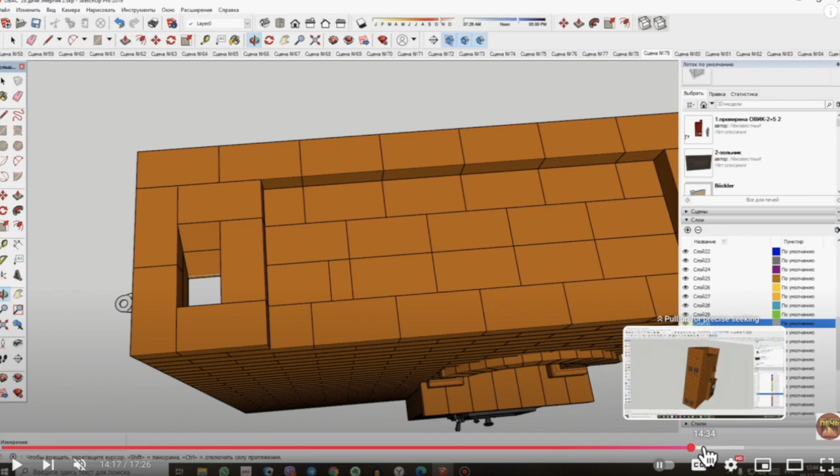So let me jump around here, I wanted to go to 1439. Bear with me as I jump around here, sorry, I have to do this a bit. That's the stove, they use these computer programs. Now again, very intricate, but you'll see as we go through the core of it, anyone can do this.

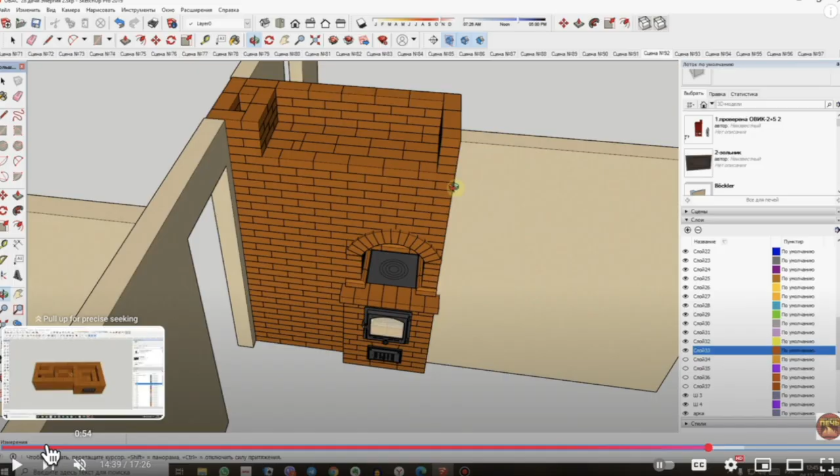So again, I'm going to go over how he built it, show you or tell you everything you need to know if you want to build this exact stove. Then I'll show you the simpler version, and then the simplest, absolute simplest version, if you wanted to make this yourself and make it a little bit thinner, just out of fire bricks. You'd have to do the whole thing in fire brick.

So this is the base of the stove. Again, the wood is loaded in here. The fire and gas is pulled down here, second bell, back and out. All right, let me go to this, this is a good thing to show you.

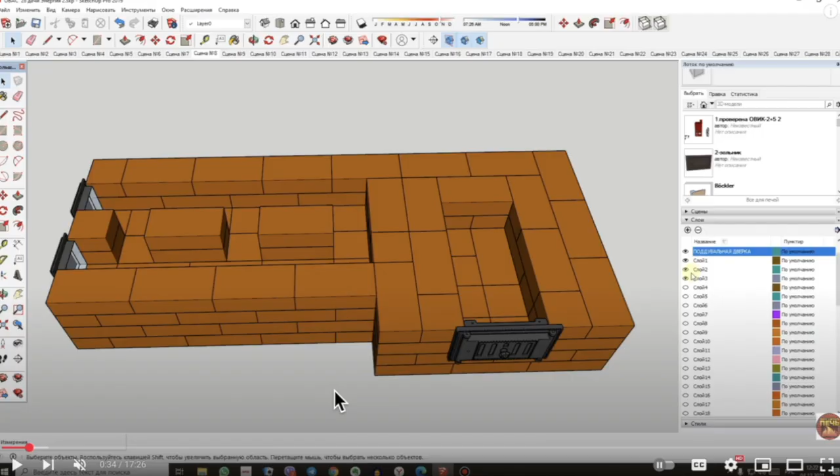Now one thing that has to be explained here: the Russians have the advantage with their fire bricks. They can get the same size red bricks as fire bricks, so they'll construct a fire brick firebox, which we can't do in the same way here in the United States. Our fire brick, 9 inches by 4.5, is never the same as red brick. You can't get a red brick that corresponds. I couldn't believe it when I first found this out years ago, that I can't get a red brick the same size as this fire brick.

No, unless you have them custom made and ordered and all this stuff. So basically we're forced to make this entire stove out of fire brick, or if you wanted to use red brick and fire brick, you have to end up making like 100 and some cuts with the red brick. So as I go through this and the simple versions, I assume somebody's going to build this entire stove out of fire brick. The fire brick is twice as expensive as a regular brick, probably like $2.15 to $2.20 per brick.

Can be as low as $2.05 per brick, but it will absorb heat. The regular fire brick's heavy and will absorb heat in the same way as a red brick. So you can make an entire double bell stove out of just fire brick, and it'll hold up just fine for years.

So anyway, let's get into the design. Right now he has not constructed the firebox, which is a yellow or tan brick. This is the ash door, which will allow the air in.

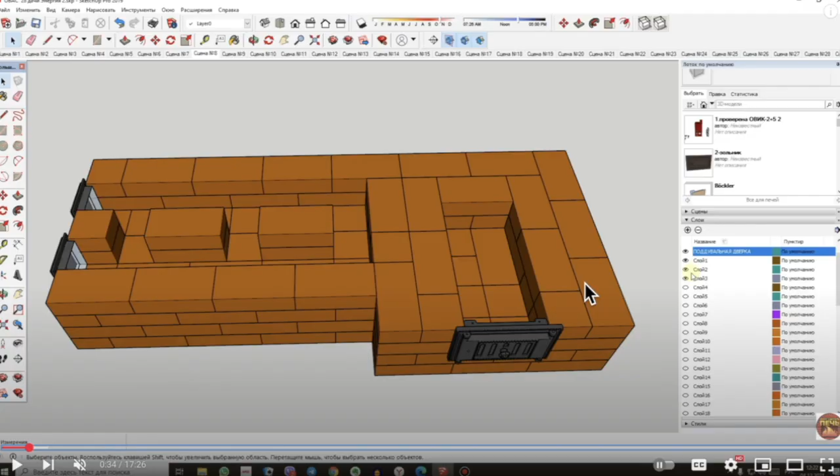This is extremely difficult for anybody listening to me, because in the U.S. our red bricks are not the same size as the fire brick. You can do it if you have a great gigantic wet saw and make a bunch of cuts with the red brick, no problem. So here he's laying out the base with the red brick, and then the fire brick fits right on top perfectly. We don't have that option in the U.S.

Basically what you're seeing here is the outline of the red brick. If you wanted to construct it, you would just use the outline shown in red brick as your fire brick, and that would be fine. We wouldn't have a separate firebox as he's constructed here.

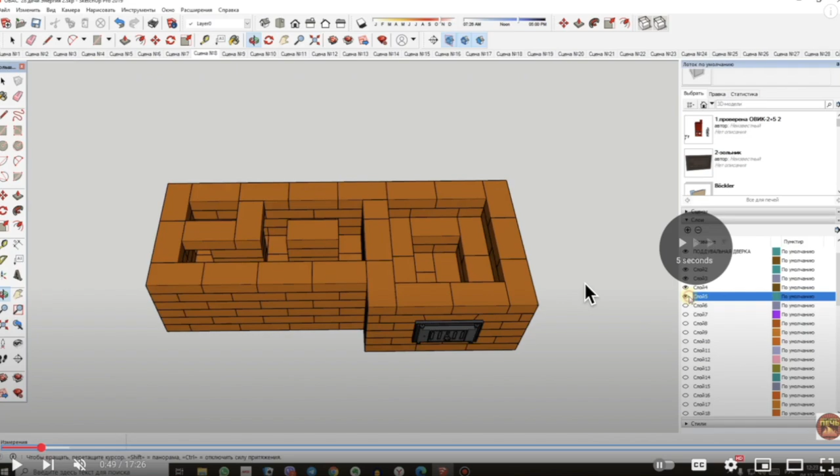So let me go through this a little bit more quickly. Here he's started to construct the first mini chimney up into the second bell. So this is the firebox - wood is loaded in from this side. As this wall goes up, there'll be a hole at the top in this wall that allows the gases to flow over the top, and then they want to rise, right?

So they're going to hit the top here, and the only way to get into the second bell or out into the chimney, out of the house, is they will have to dive down and slip under here. You'll see how this is constructed in a moment.

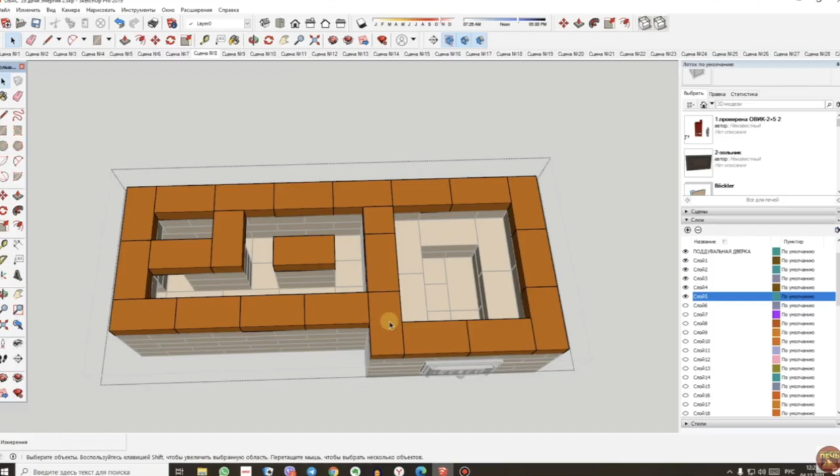I'm going to skip around. Let me see and put my hand on pause. Yeah, you'll see the hole - dive down.

The gases will basically hit this brick in the middle. Some will go this way, some will go this way. They're allowed two entrances into this first little lifting chamber that goes into the second bell. The reason for this is this stove is 2.5 wide.

So this is a Kuznetsov design that he's copied, from stove.ru. Kuznetsov does a great job with his stoves - if you create a shelf in the middle here, you can then use it for your ceiling to separate the first bell from the second bell. At the top of the stove, you'll just lay bricks across, and this shelf will hold your ceiling. You don't need lintels or angle irons to hold your bricks.

Also, having a bunch of bricks piled up in the middle here just adds mass. Any opportunity to add 150 to 200 pounds of mass, or whatever it is, is a good idea.

A lot of people build these stoves - they put a rocket stove or a batch box rocket stove into a gigantic bell, a gigantic square of red brick, and 80% of that square is completely open. I'm always saying, well, why not fill up that square, that bell, with mass? Even better, the best way to do that is with cinder block or cement block with holes - just a cement block that allows a lot of air. Obviously, if you fill it up with mass, you don't want to block your entrances and your exits.

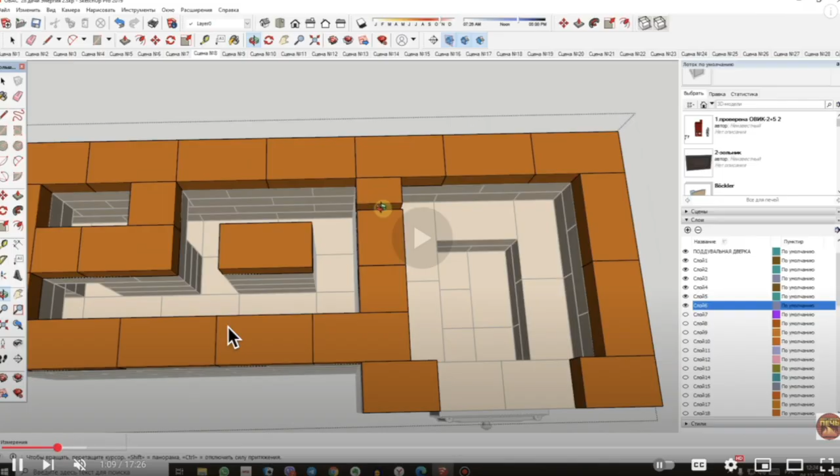So playing again, let me move a little bit more quickly. He went back, going forward - don't lock up, no, it's just going to be a little slow.

Of course, when they make a slit like that in front of the door, the slit allows a little bit of air to flow up and wash the glass, so your glass doesn't get black.

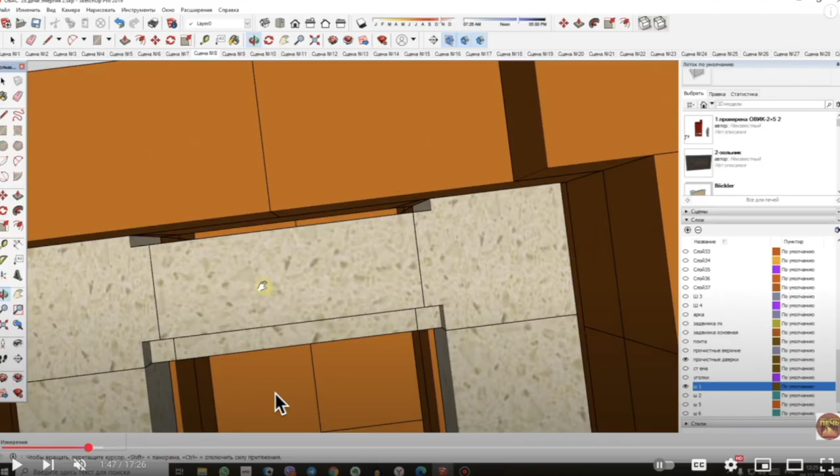Sometimes when the glass gets black, if you burn your firebox hot enough, eventually that black and that char will burn off because of the heat. So there, to create a place for the grate, he makes a lip.

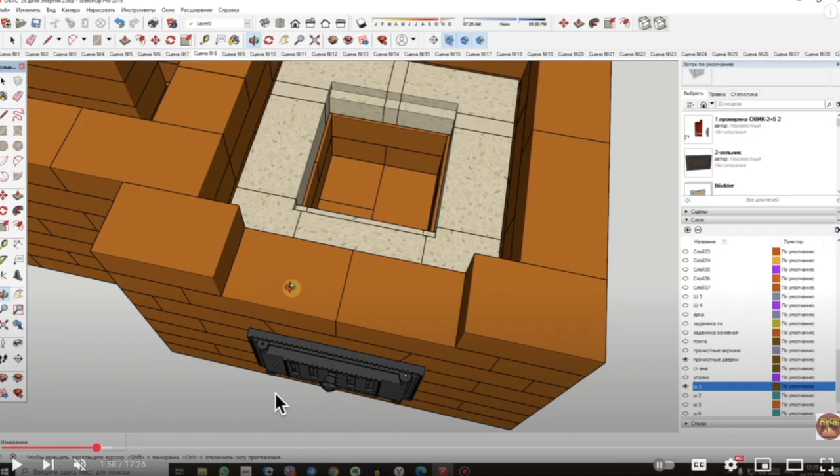Fire brick is very easy to cut on a wet saw. Just use a wet saw or wear a mask. It's dangerous with the silica and the sand. Red brick you can breathe if you cut it. You don't want to breathe fire brick or silica sand if you cut it. He's making a lip there, which eventually will hold the grate.

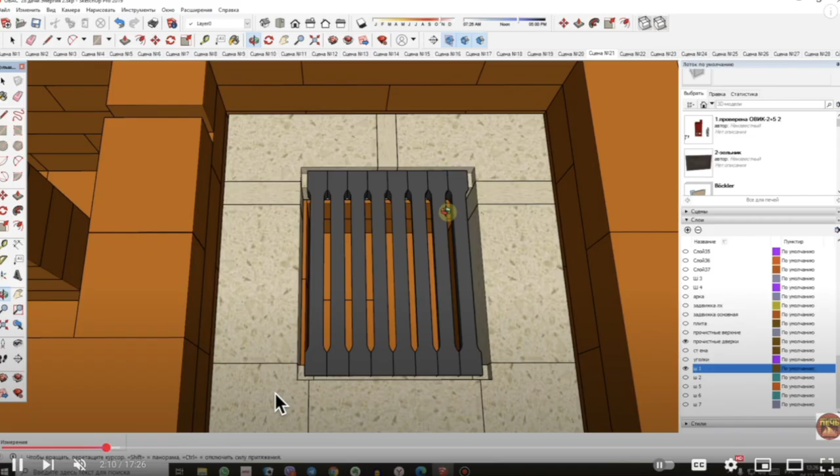There's the grate. Again, the people that I'm talking to aren't going to do this because, again, your red brick and fire brick don't go together. What we'll do, and I'll show you how to do that, is just make the whole thing out of fire brick. We're not going to do a firebox inside of a red brick box. The whole thing will be made out of fire brick. So I'm going to skip forward.

I don't know. I don't know why it's so slow here, guys.

Okay, there he's starting to create the Russian dry slot, dry seam, or dry joint. So very, very shortly after the firebox, there's a little seam of, Kuznetsov says 2 to 3 centimeters, but I would make it wider, of say 1 inch or just under an inch. That allows some of the gases to immediately start escaping into this second chamber over here.

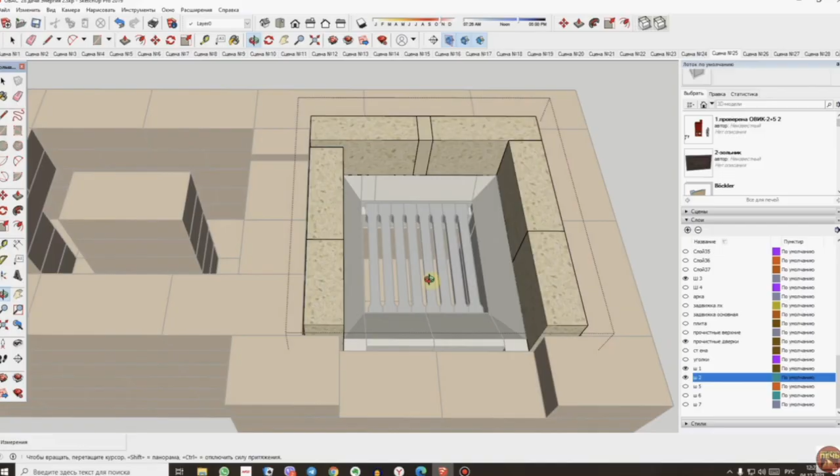This is not the primary way your gases and flame are going to get into this chamber, but I think this slit or slot is really a good idea for a lot of reasons. I don't want to spend too much time on it here, but almost right away, with a little bit less than 1 inch, allow the gases to immediately start, if you can.

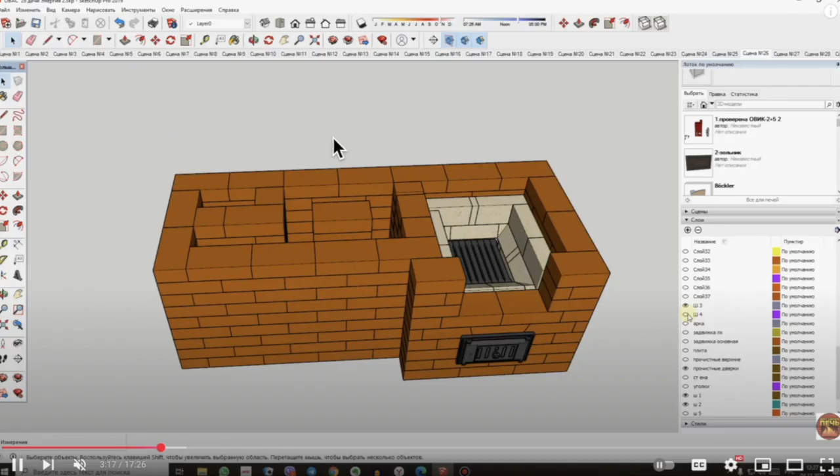Now, if you're blocked there by red brick, it looks like he's blocked, but he would have made another slit in that red brick to allow the gases to come through into that chamber off to the left. Yeah, he's put a slit in both. It helps with draft. It helps with initial draft. It helps with priming. There's a lot of reasons for it.

You lose a little bit of efficiency, but most of the flame wants to shoot straight up. Most of the flame does not want to go through that slit. And I don't want to get into what the Russians believe, that all the cool gases escape early. That, to me, is a bunch of BS. But we'll talk about that some other time.

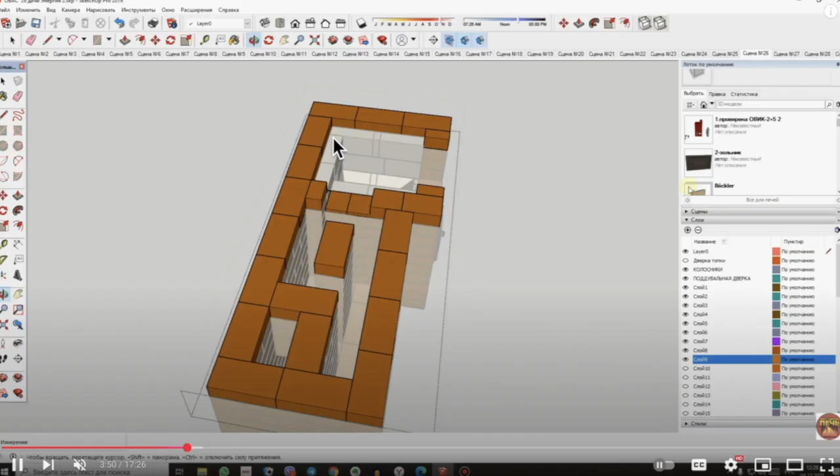Okay, starting to make the hole, the major hole, so the flame and the gases from the firebox can escape over into that secondary chamber. Here he will have a cooking plate on top, and then there's also a second bell on top. We'll talk about what your options are if you're a novice and you don't want to make the arch and the cooking plate and all the little add-ons.

So with the hole here, the flames will start shooting through this little slit, which I recommend, and then the hole gets big. Flames will pour over the top here and hit this. This basically adds mass, and it's a place for your ceiling bricks to rest on, so you don't have to use lintels or angle irons. Some of the gases will hit this wall. They'll have to dive down and go under here and up this first lifting channel into the second bell.

If this was all you had for your stove and you just wanted to make it an L stove, you could also extend this firebox this way and make it much longer. You could make it a bench stove, or an L stove per the way it had to fit into your living room or house. It still would be close to 1,000 bricks, and still a heck of a masonry heater if you decided not to do the second bell and all the add-ons. Still 5 times better than an iron stove or a regular stove.

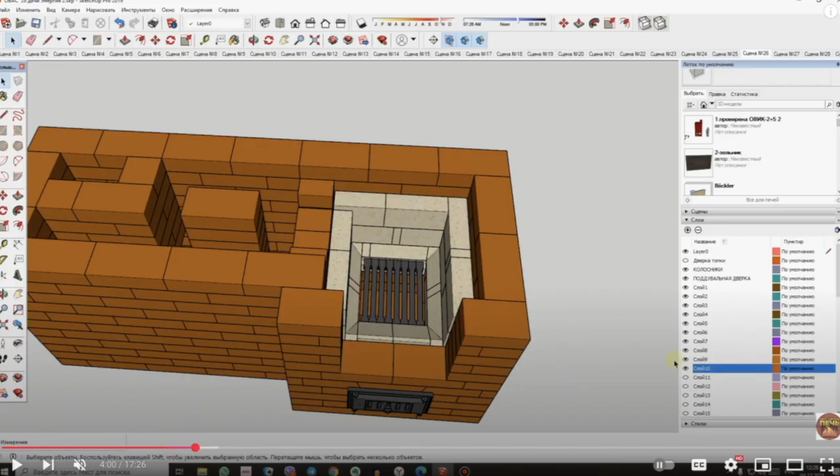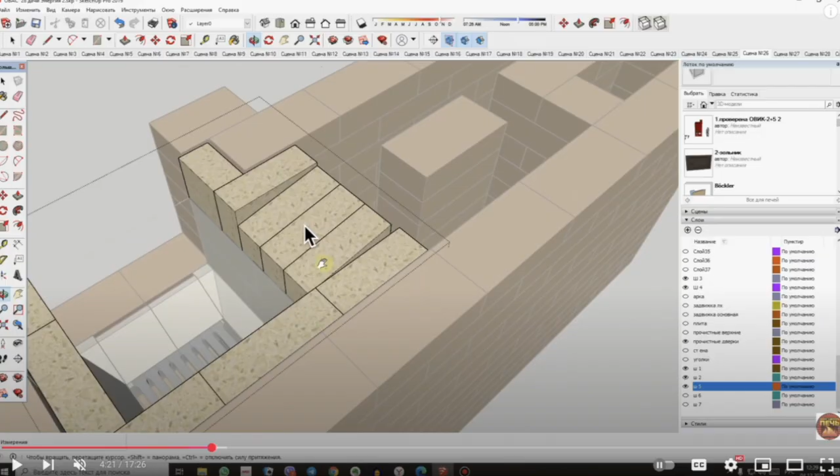This guy's a master stove maker. I assure you, just make a hole, a nice big hole. There's no reason to make angled cuts; it means less than 1%. Okay, there you can see it. Little angle up, forget that stuff, guys. It might mean 0.5% in terms of efficiency, or sometimes these guys don't want to make them too simple for their clients. That's how they make their living.

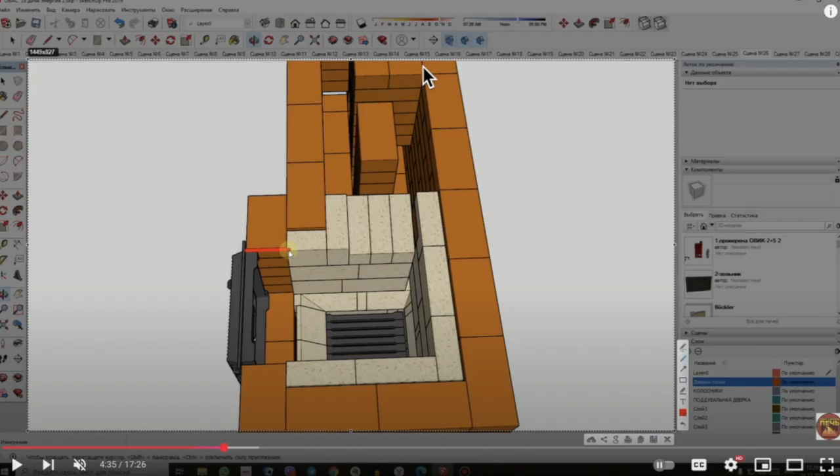You can see the dry seam here starts immediately. And again, if you're just doing this all in firebrick, you just make the stove, the red brick here that you see would be your firebrick. And there would be no box inside the box. I'll talk about that a little bit later. You still can make your dry seam and allow the gases to escape immediately.

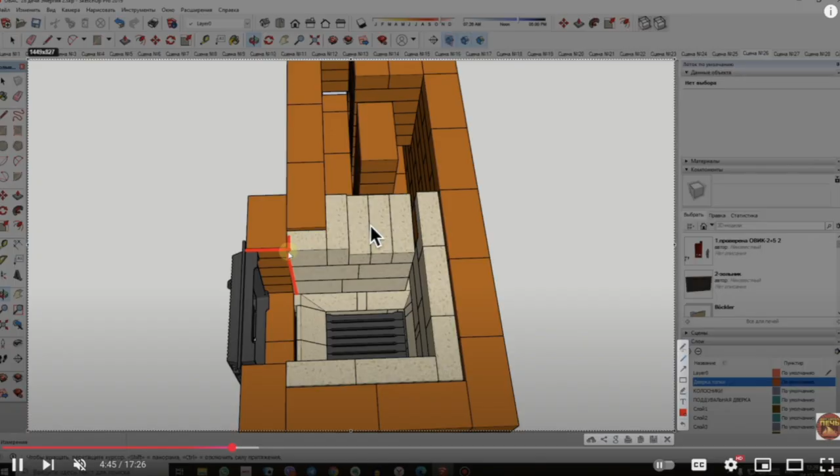Okay. I'm a little bit slower than I thought, guys. I need to speed it up a bit. And again, I have little tiny mini bricks downstairs stacked up. I'll show you the real simple design at the end. All right. Let me go back. There's the door, and I'll show you the door.

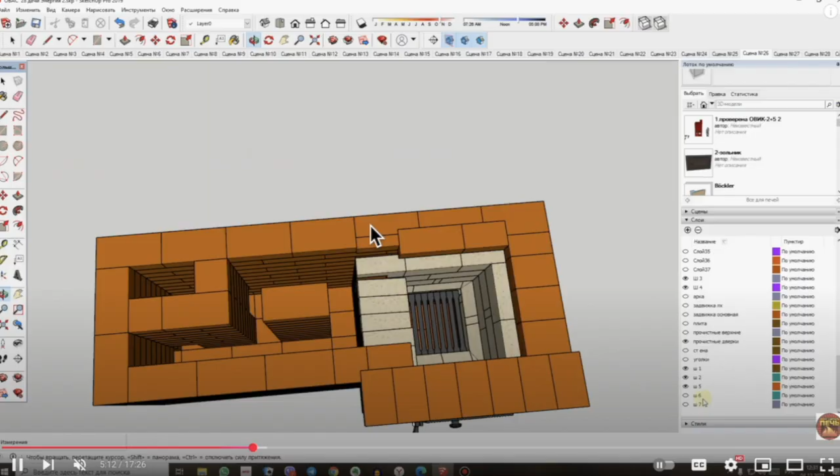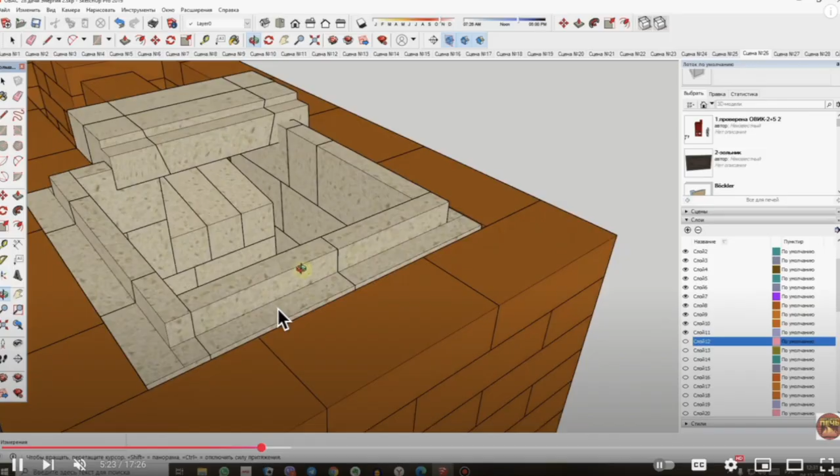Okay, there you go. You can see flames come up. There's going to be a cook plate on top. So they'll slam against an iron cook plate and be pushed left through this hole. Always err on making your hole a little bit larger. Never choke it off. Never try to get too cute. If you lose a little efficiency, you'll have to add an extra 2 or 3 logs a day. Big deal. Don't want to get too perfect if you're a novice.

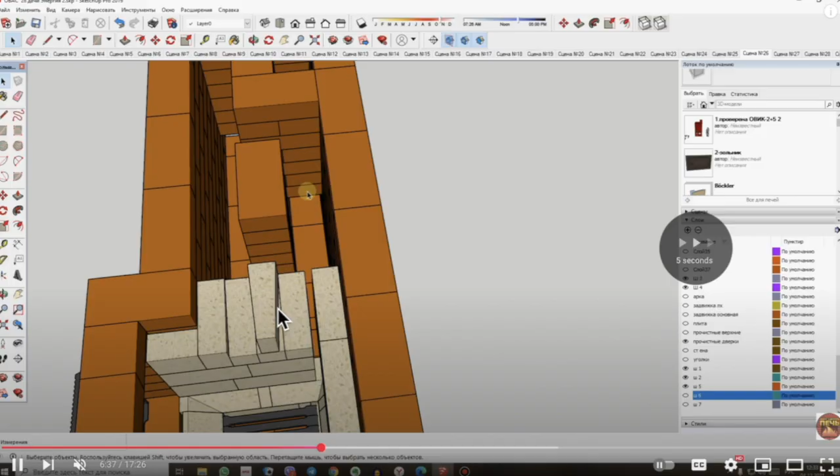Again, he's combining firebrick with red brick, which we're not going to do. The general principle here is a great simple stove you can do all in firebrick, and I'll show you how to do that. Let me skip ahead. We're not making these angle cuts. There is no reason for it. Just make a freaking hole. And then I like this shelf here for a lot of reasons.

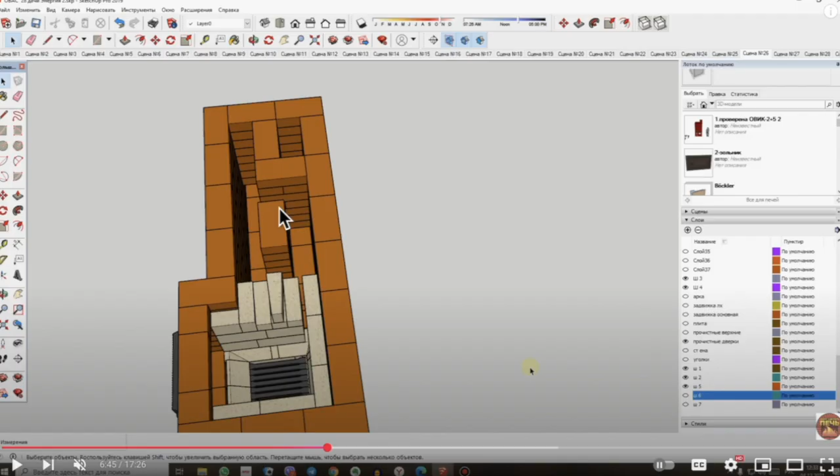Between the first bell and the second bell on top, you have to make a ceiling. Your bricks will completely close everything off except this lifting channel that allows the gases of the flame to get up into the second bell. It allows you just to lay your bricks across without a metal lintel or angle iron. If you have to bridge a big gap, that's what you need to use. And then people put insulation around them because they warp a bit, so avoid it if you can, especially if it's right in the path of the flame.

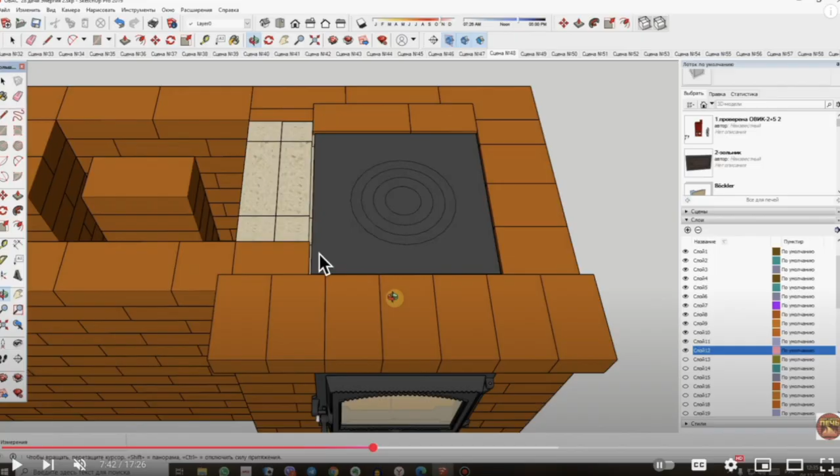A lot of heat will be thrown from the door, and a lot of heat will come off this cook plate. Without a cook plate, you could also put a piece of soapstone on top that would heat up to red hot in just about 10 minutes versus the hour and a half a fire brick would take. So it's a hybrid approach. You can get a little bit of quick heat out of it if you do something like this.

If you put a cook plate on, though, or a piece of soapstone, this is a personal thing with me, carbon monoxide, and just without all the details, you don't want to take any chances. You got to seal the absolute crap out of this, even if it looks ugly. If your flames are pounding up into this cook plate and you don't have this thing sealed right, you got to check. You do not want gases and carbon monoxide.

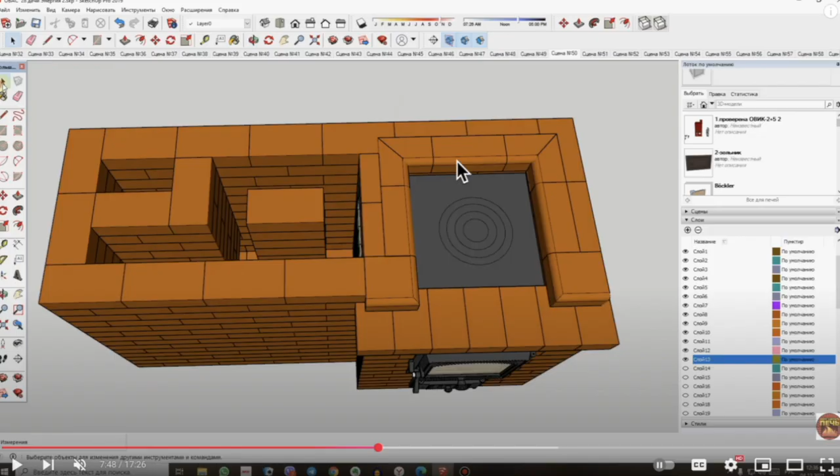Extremely dangerous what these Russians do to have the flames pounding up against these cook plates, and they'll even remove the discs for the cooking. I don't know. If their house is airy and the air flows through, it's safe. American houses are airtight. It's extremely dangerous. I don't want to harp on it for personal reasons. If you're going to add a plate, make sure you are triple safe.

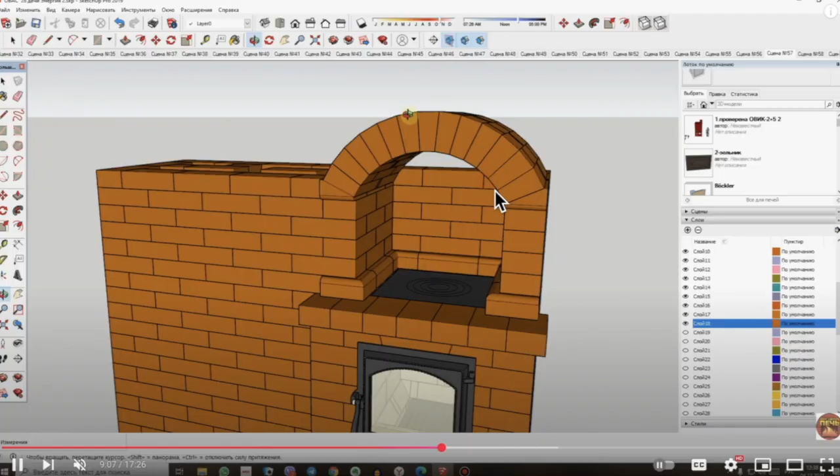All right. Trying to move a little bit faster here. Fast forward. Same principles. Since there's a cook plate, he needs to make a whole space on top for the cooking and to get in there to put the frying pan on. He puts in an arch for decorative reasons. Again, the novices that are going to make this are not going to put in the arch. Let me finish up. Okay, there we go. This is the first chamber, first bell completed.

Gases slam against the cook plate. They're pushed left through the hole. They go across here and they have to dive down to get into the lifting channel. They're going to come up. Why are there 2 holes here, Matt? Well, one's going to be a damper. You can see this is cut out already for the damper. And one is going to be the primary lifting channel to get into the second bell, the second box on top of a box. This damper will be here for the first startup or the priming of it.

It's needed because this stove will just smoke your house out. With these intricate designs, you can't just throw wood in here and light it. It'll smoke your entire house out. And who knows how long it would take to prime. You have to have a way to prime the stove, to have a quick path for the gases to escape, to get into the chimney, to heat the chimney so the chimney starts pulling. Then when you close the damper, which then starts winding the gases around, they'll continue to wind around and get out. Without this, you'll smoke your entire house out.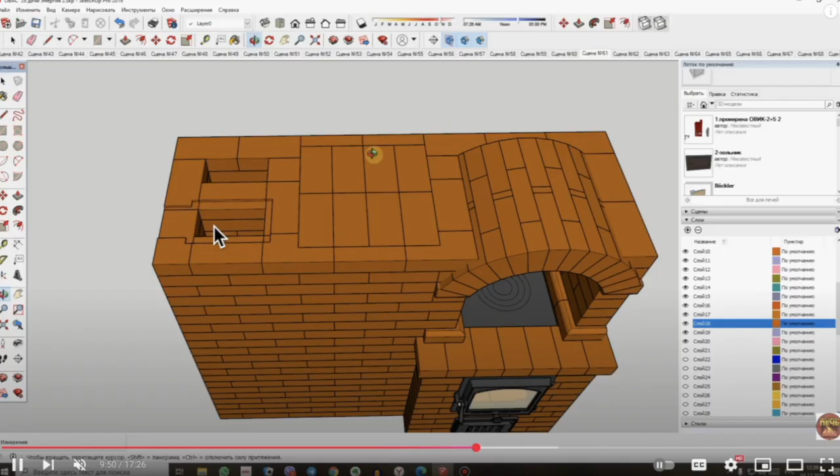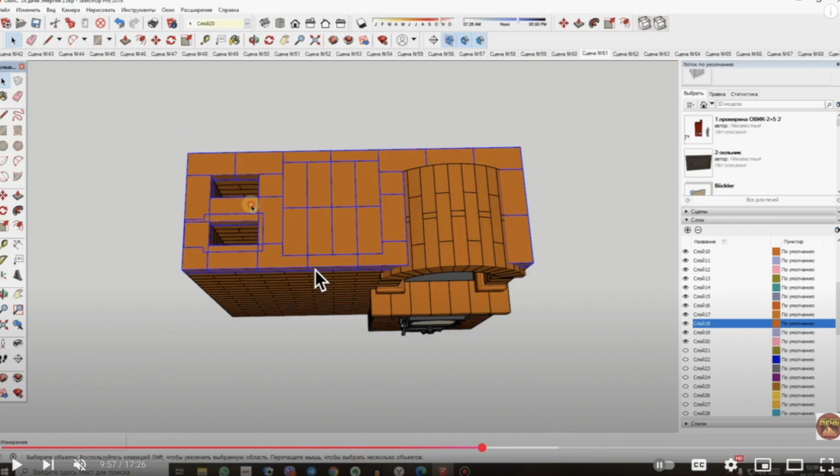But this is a great example of proper use of a damper. So again, he's created that first ceiling. Remember those bricks in the middle that I called the shelf? Just laying bricks across with the shelf holding everything up without lintels going across, without angle irons. And let me skip forward. There you go. There is the lifting channel, remember, was in the back. Gases escape, go underneath this way, go under this way, up the lifting channel.

But when the stove is first lit for the very first time, the damper is opened, so the gases don't have to dive down and come up this lifting channel. The gases will then flow right across the top and up through the damper, into the second box, into the second bell, and then right up through the chimney, warming the chimney. Once the chimney gets to be a few hundred degrees, sometimes 5 minutes of burning, not even. You could err on the side of 10 minutes of burning. Close the damper, then that forces all the gases low, and they're going to wind around the stove because you've primed everything and heated everything up first.

So this is also the correct use of a damper, because I don't want to get into it too much, but these dampers, they're not completely airtight, and they could potentially let a little smoke or carbon monoxide out underneath the plate here. But I shouldn't even be mentioning this. This is kind of a complex subject. This is a perfect location for a damper. People put these dampers right in the line of the fire, right in the line of where the gases and the smoke go, and I think it's a little dangerous, but we'll talk about that some other time. Hold on.

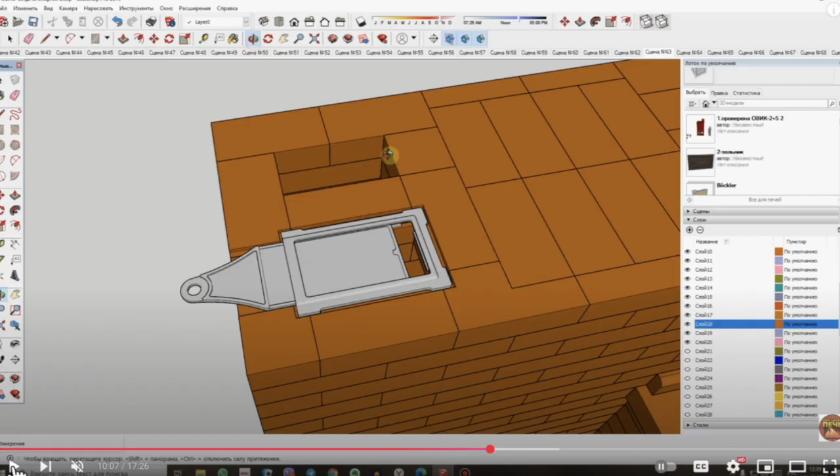Okay, where were we? Play. Let's fast forward to the 17-minute video. We're about at 10 minutes.

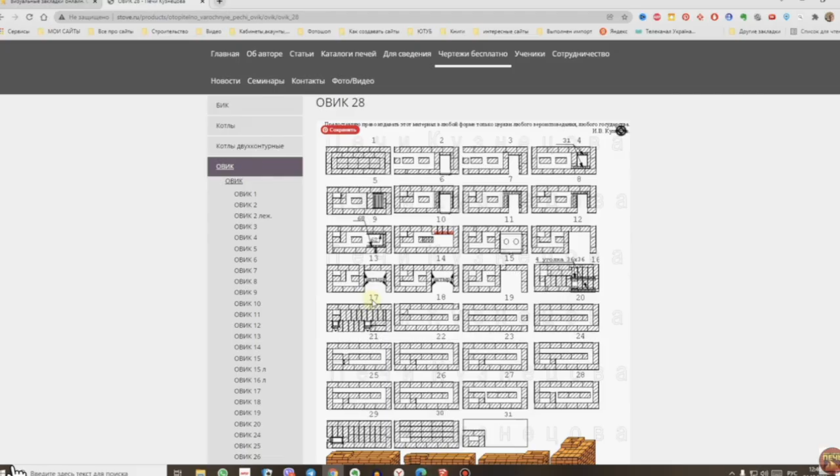Okay, she's just showing you there. It's stove.ru - the plans for the more complicated stove are under OVIK. It's all in Russian. This is the section for cooking and heating stoves, Kuznetsov's website, stove.ru. But you don't need this - he shows you everything here. Again, I'll show you a simple design.

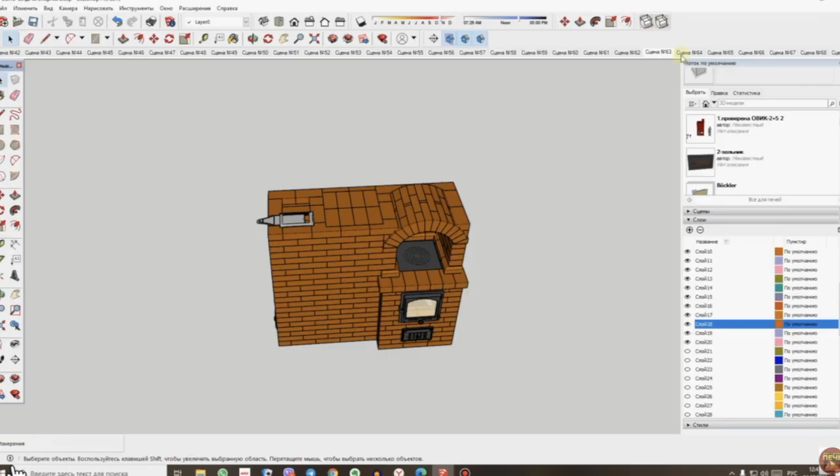Now here it looks like the stove's done, right? That's only the first bell, only the first section that's completed. But you could finish there, of course - you don't have to continue with the second bell. It's just some massive masonry heater, thousands of pounds of stored thermal mass, if you want to do the second bell on top. This is a pretty classic way of how the second bells, or the bells on top, are done.

Once the damper is closed here, again, the lifting channel is in the back. The gases - this will become a wall. The gases will wind around, and you know where the ultimate chimney is going to be, through the roof, where the damper is, is where the chimney is going to be. So it's going to be up the front here, I'm sure. Why - is this, like for somebody that's new - is this absolutely necessary, a way for the gases to escape here and go around here?

No, again, remember, he's just using this brick as a way to hold other bricks. This is not necessary at all for the design or the physics of the stove. It's just here to hold bricks for when you make your ceiling - something's got to hold them up without lintels or angle irons. So just make sure you have enough room; some of the gases will come around here, but some will also be pushed here, and this won't be that hot.

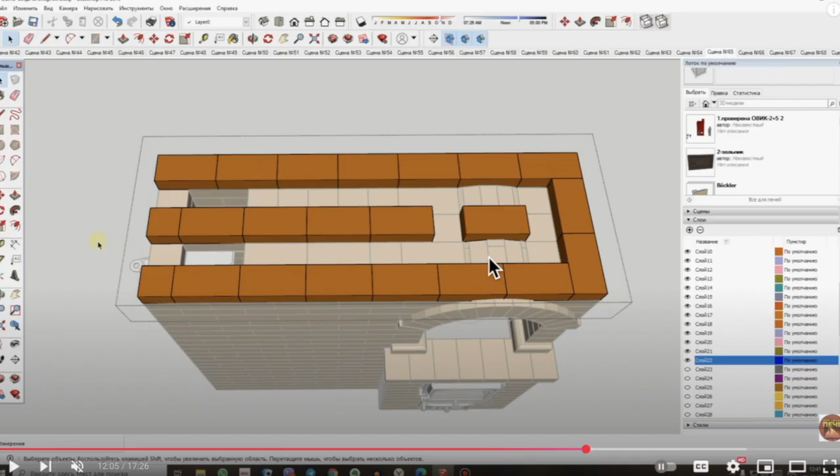Most will want to escape - they have a mind of their own, they want to escape as soon as possible. But some will go around the side, and this will heat up as well. The idea behind all these stoves is to have all the bricks touch the hot gases and have them all heat up relatively equally.

I'm going to go back and show you the clean out doors. There's 2 clean out doors there, and there's also 2 clean out doors at the bottom on the base. Very, very important to be able to get in and clean it out.

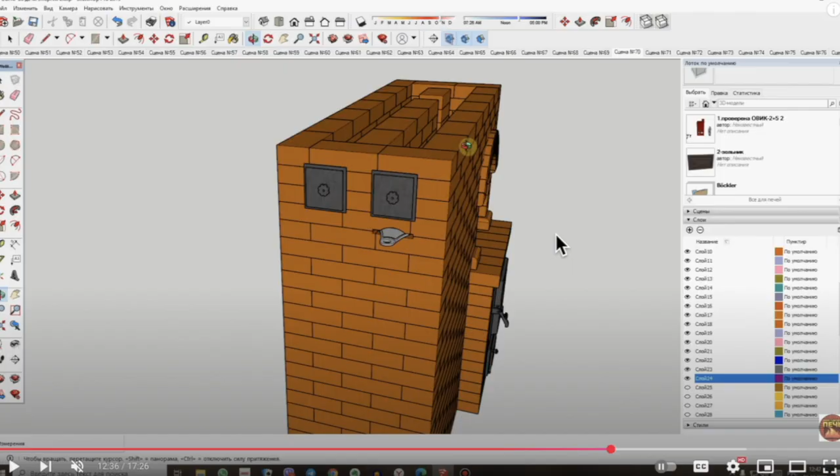They usually say they only have to clean them like once a year - there's usually not much in there. But if you're burning the wrong kind of wood, or it's wet, or if it backs up, you need the way to clean out. The whole thing's for nothing if you back up or have a creosote problem.

And so same principle here. Let me go back actually. Okay, so where the lifting channel was in the back here, he'll go up. Does he go up 2 or 3 rows before they start making that next wall?

So the gases - this will go way up. The gases will come all the way up, and then they'll have to wrap around in this form here, but much, much higher. They'll wrap around, and they want to stay high. They'll have to dive down to get underneath and up the final channel to get out.

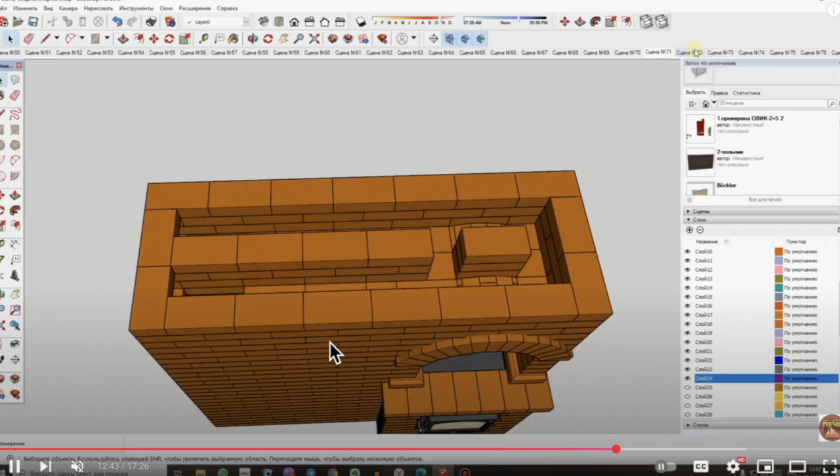So let's see how many - there's three bricks, 1, 2, 3. So it's 2.5 for a fire brick on its side, so it'd be 7.5 inches - that's a good space, is what they're allowing for the gases to escape underneath. Again, Matt, can I do 2 bricks?

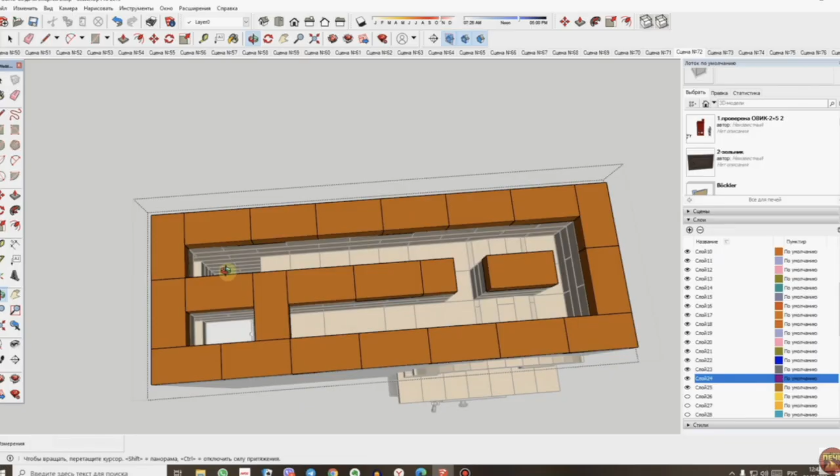There's no reason to choke it off, no reason to be too perfect - the whole thing won't work otherwise. Always err on letting the gases out more quickly if you're building something like this. Again, we're not master stove builders - if we can get to 80% efficiency versus the 90% they get, that's fine. It means 2 or 3 or 4 more pieces of wood a day or every other day, like big deal.

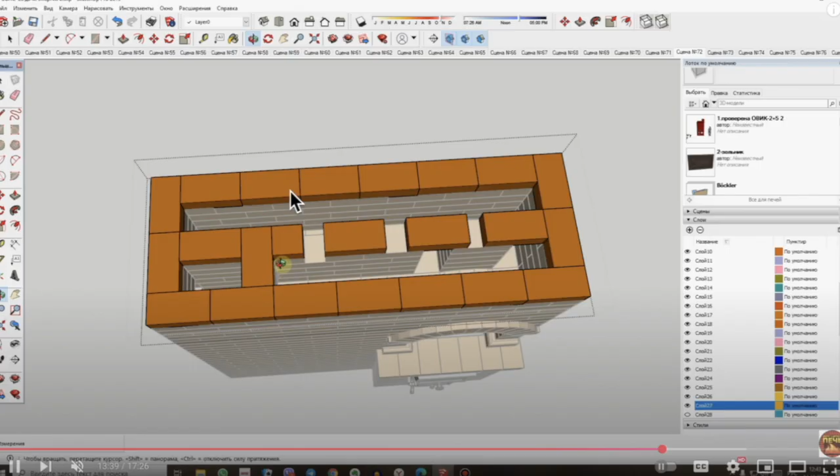So yep, and this wall just gets bigger and bigger and taller, and this whole stove goes to 5 feet, 6 feet, 7 feet tall. You can basically go up as high as you want, use as many bricks as you want, and again, he's covering - he's starting to make his ceiling for the top bell. That's why. But again, you see how deep this channel is - the lifting channel.

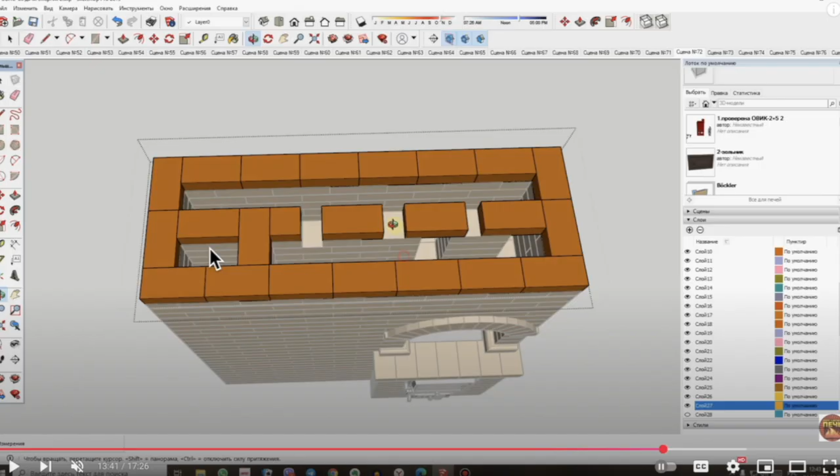The lifting channel allows the gases to turn to the right as soon as possible, then go around the bottom this way and that way. Remember, there's a 3-brick opening at the bottom here to dive, where most of it will collect. The idea behind these bells is you want some of the heat, at least for a few seconds, to collect up at the top and then eventually work their way down underneath and out. This front part here will be the final way out of the house, into the chimney and through the attic, out of the house.

Another damper will be placed, and the stove is now finished. This is the ceiling on the second bell, and they always put that second damper in, which is extremely dangerous.

If you don't know what you're doing, this can be dangerous, but the Russians have been doing this for hundreds of years. They burn it for an hour and a half, 5 or 6 logs, because it's burnt twice a day for 6 months in many parts of Russia, with no days off. The bricks always keep a degree of warmth, so they never have to reprime or restart the draft, because the bricks stay kind of warm. The priming is only done once.

But when it's just coals - I don't know if they do it when the coals are red or even later - they close this final damper, which is the pipe up through the attic and through the chimney. They close it off completely so the heat stays in the stove, but also, if it's negative 20 degrees outside, you don't have ice cold air rushing down into the stove to cool all the bricks down. If you go to light it in the morning, the whole thing will back up in your face or out in your living room because it's gone ice cold. So the main reason for the damper might even be to keep the cold air out.

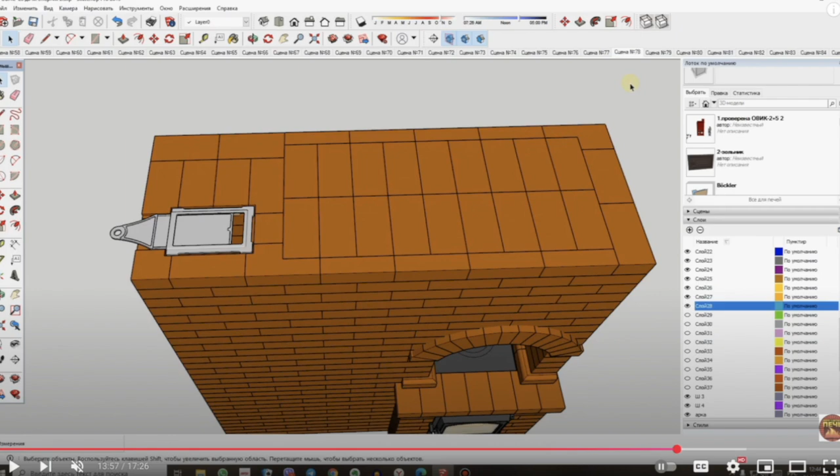They've all told the stories: if you have a bunch of hot coals and you close this off too soon, it's a carbon monoxide, poisonous gas fest. You have to be extremely careful. If you're in the United States and it's 38 degrees, don't even think about closing a top damper all the way. I can understand why they need to do it if it's negative 25 degrees in Russia, but you want to at least leave a slit open. I have a personal issue with this because I had a real serious problem that might have been caused by this sort of thing.

Now let's look at the guts of it, which is always fun. The Russians will put the stove touching 3 or 4 different rooms. This wall touches the bedroom, the front side here where you load the wood is the living room, and this wall touches the dining room. So they put it right in the middle - it heats 3 rooms at the same time if it's not an open floor plan.

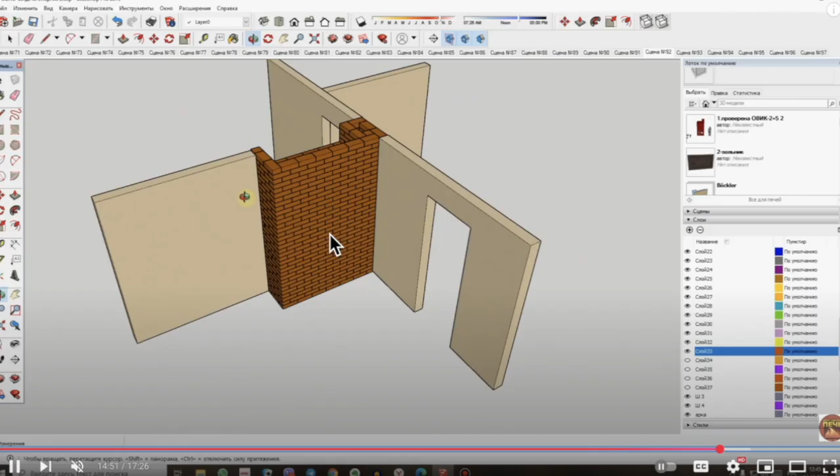Ideally, the stove is built first, and the house is built around it - that's the typical way they do it. So this is from the back side. The door is here, you can see the hole, the firebox, the grate - air comes up from under through the grate. The hole where the gases pour into this first chamber, this little first bell, goes off to the side as we looked at. Again, the angling up means nothing - just make a big hole.

Here's where the gases will collect. People are so in love with stratification, and I know I don't have to mention it every time, but the gases don't perfectly stratify - the idea is to keep the hot gases up here for a few more seconds before they dive down and underneath, through the 3-brick opening to get under into the first lifting chamber, into the second bell, where they're forced around the corner here, up and out.

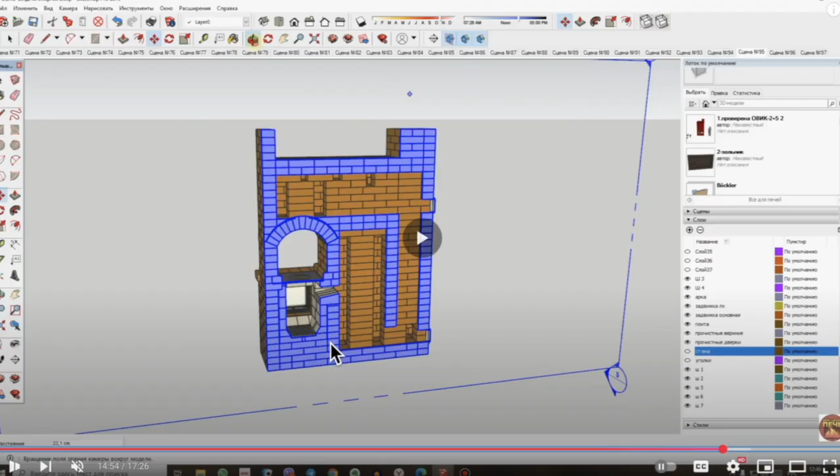That angle going up drives me nuts because it's useless, but anyway. There's the cooking plate, and there's the little arch.

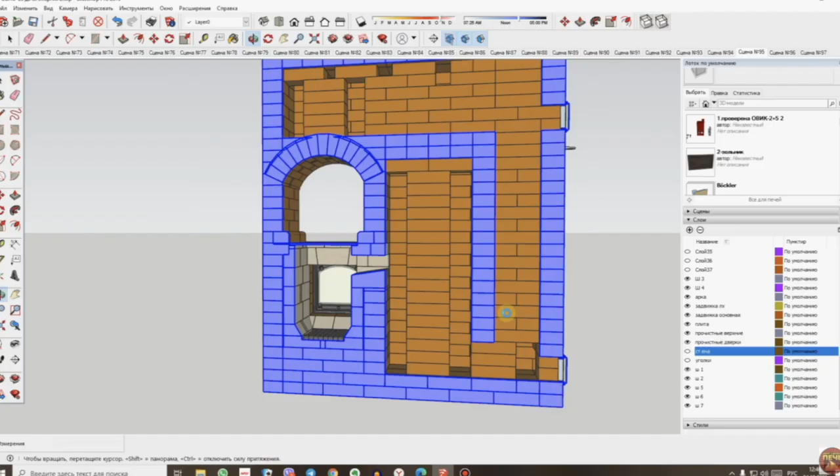I'll tell you what you can do if you don't need to be able to copy this exactly. There are simpler versions of this, and this is already getting too long, so I want to get to the simpler versions.

Okay, this is a great cutaway of how the two dampers work. When you're priming it, this top damper is almost always going to be open, except at night when it's -20 to keep that cold air out. So, of course, there's all sorts of stories of people forgetting to open the damper.

It's just a nightmare. You should put a big sign, remember Kevin Bacon in Apollo 13, don't touch the buttons. Don't ever push this in unless you have to. There should be a big sign.

But when you prime it, this damper goes out, and the flames come through here. When this damper is open, they can just rush right up and out the chimney, shooting straight up through the attic, through the roof, heating and priming it. So when the damper is closed, the gas has nowhere to go but to dive down and go up into the lifting chamber, up into the next bell. They're going to go where they're supposed to go once everything is preheated.

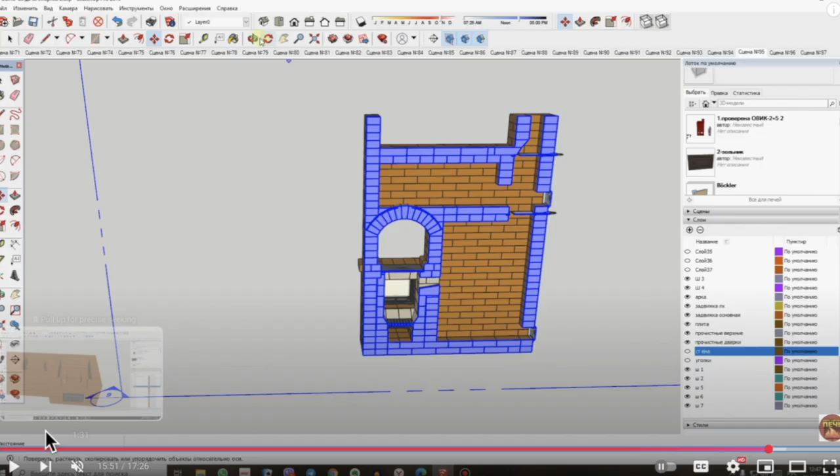Play, finish, I'll go back and show you the... we could go through exactly what's going on here, but it wouldn't do anybody any good.

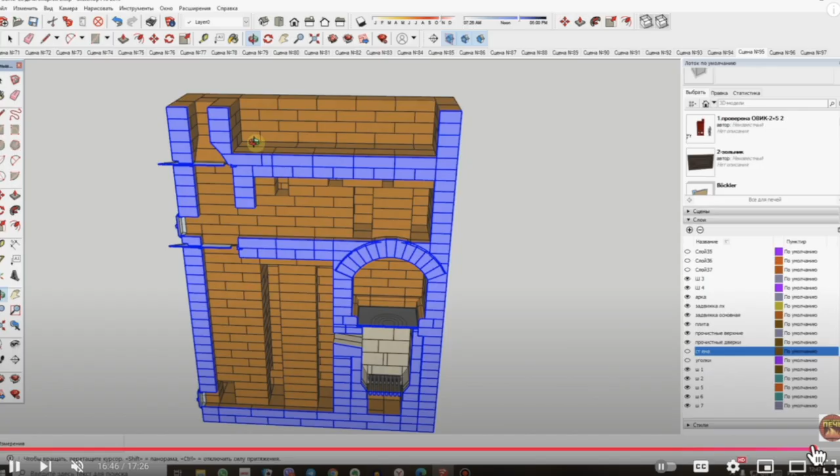All right, guys, I guess that's it, and it's it for this part. I'll show you what the stove looks like finished in just a moment. It's really a nice stove.

Remember, you get really hot burn immediately with a grate. Let me go back. When you have a grate and the air comes from that ash door up through the wood, it just starts burning like crazy, like a raging fire immediately. But you don't have any coals in the morning or anything like that. A fire on a grate with air coming through doesn't last very long. It's supposed to burn at super high temperatures for a short period of time.

You don't have any sort of coals to relight in the morning like you would have with an ironwood stove. There's the cook plate on top, which acts like a little mini iron stove to get some heat initially, because this thing will take 2 hours to start radiating out heat.

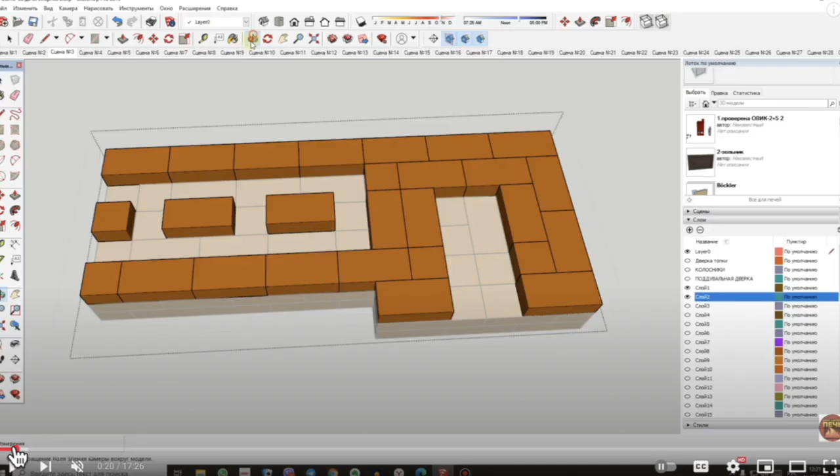Okay, really cool. Let me go back to the beginning there. The base - remember, the openings there on the left, your 2 clean-out doors at the bottom too. So you've got 2 clean-out doors at the bottom of the first bell, and then in the exact same positions, 2 clean-out doors at the bottom.

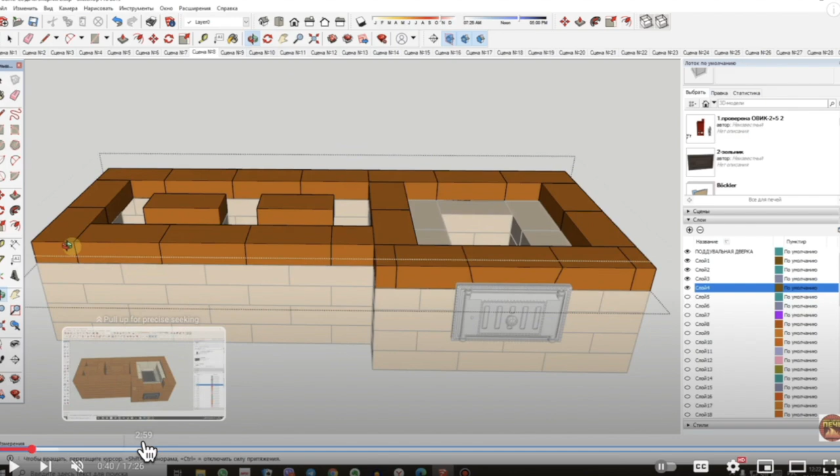They probably have this at firespeaking.com too. Gotta have a way to get in and clean it out, guys. Absolutely essential. So what I think I'm going to do is take the video camera down to the bricks I have downstairs to show you how you can make a really easy version of this stove.